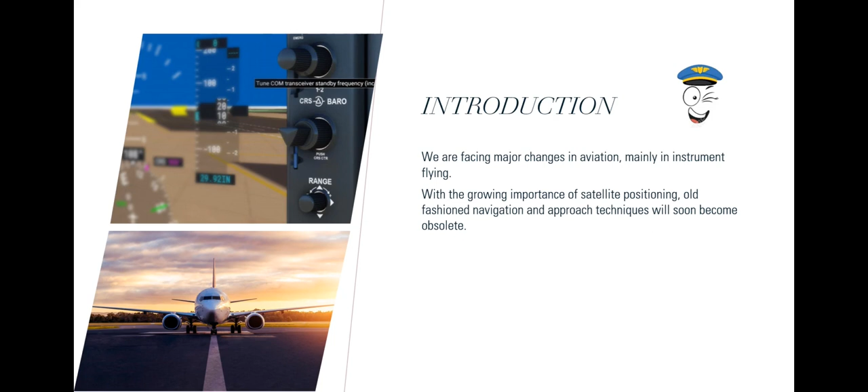With the growing importance of satellite positioning, old-fashioned navigation and approach techniques will soon become obsolete. What about pilot core competencies? Are we bound to follow the line and nothing more, or should we keep training those procedures and techniques to keep what makes a pilot a pilot: mastering?

You think right if you are watching this video. Let's train as a pilot. Satellite navigation and approach techniques will be a part of your training.

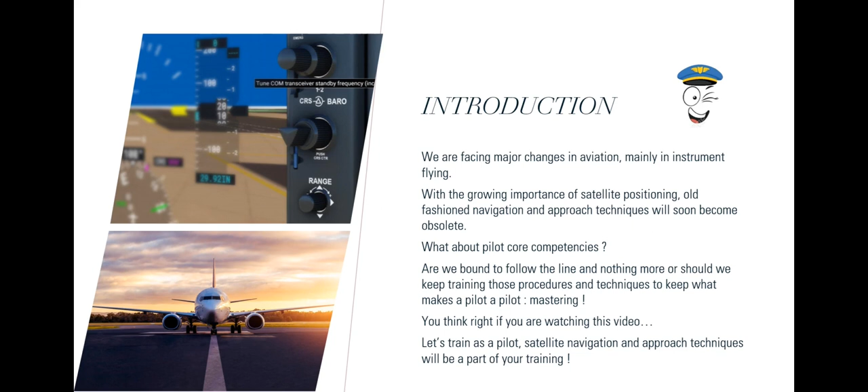Theory. System description.

Automatic Direction Finding, ADF, is an electronic aid to navigation that identifies the relative bearing of an aircraft from a radio beacon transmitting in the MF or LF bandwidth, such as a non-directional beacon or commercial radio broadcast station.

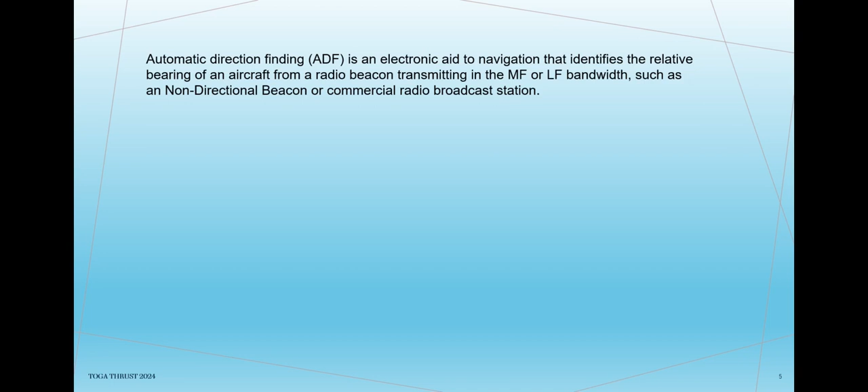Essentially, ADF consists of a loop aerial which is rotated physically or electronically and detects the direction of minimum reception from the beacon relative to the aircraft direction.

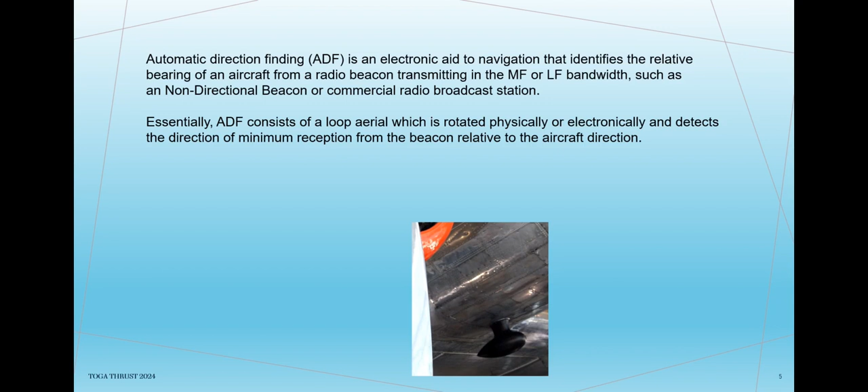This information can be used directly to home to the beacon. Alternatively, the aircraft equipment combines the relative bearing with heading information from the aircraft compass to provide bearing position lines which may be plotted on a chart.

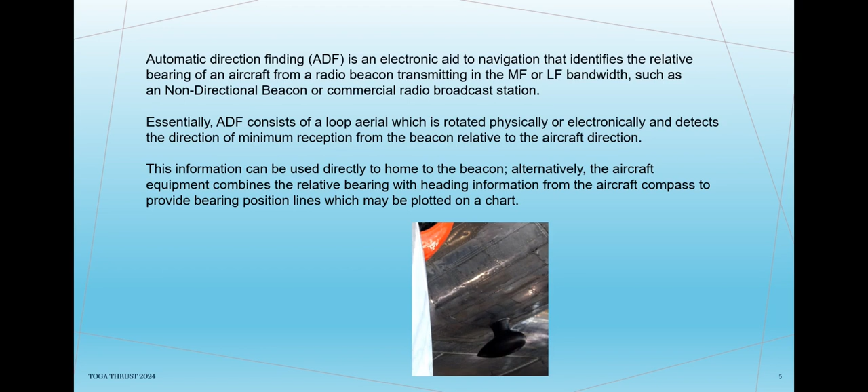An automatic direction finder, ADF, is a marine or aircraft radio navigation instrument that automatically and continuously displays the relative bearing from the ship or aircraft to a suitable radio station.

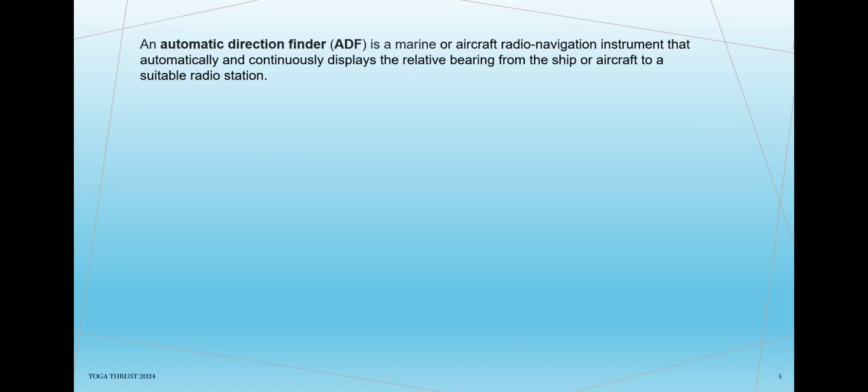ADF receivers are normally tuned to aviation or marine NDBs, non-directional beacons, operating in the LW band between 190 to 535 kHz. Like RDF, radio direction finder units, most ADF receivers can also receive medium-wave AM broadcast stations, though these are less reliable for navigational purposes.

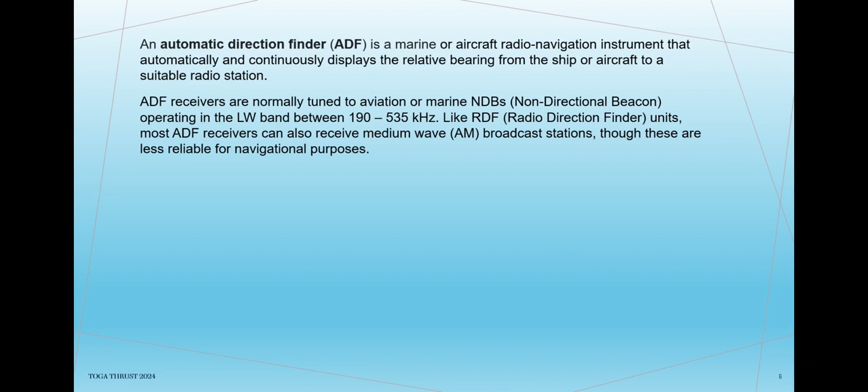The operator tunes the ADF receiver to the correct frequency and verifies the identity of the beacon by listening to the Morse code signal transmitted by the NDB.

On marine ADF receivers, the motorized ferrite bar antenna atop the unit, or remotely mounted on the masthead, would rotate and lock when reaching the null of the desired station. A center line on the antenna unit moving atop a compass rose indicated in degrees the bearing of the station.

On aviation ADFs, the unit automatically moves a compass-like pointer, RMI, to show the direction of the beacon. The pilot may use this pointer to home directly towards the beacon, or may also use the magnetic compass and calculate the direction from the beacon, the radial, at which their aircraft is located.

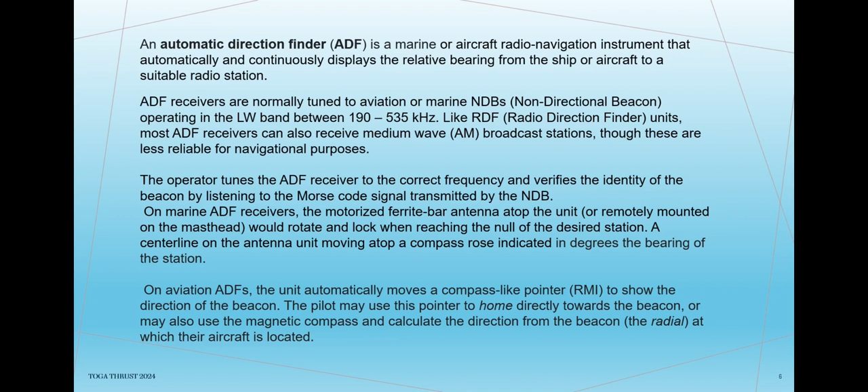Unlike the RDF, the ADF operates without direct intervention, and continuously displays the direction of the tuned beacon.

Initially, all ADF receivers, both marine and aircraft versions, contained a rotating loop or ferrite loop stick aerial driven by a motor which was controlled by the receiver. Like the RDF, a sense antenna verified the correct direction from its 180-degree opposite.

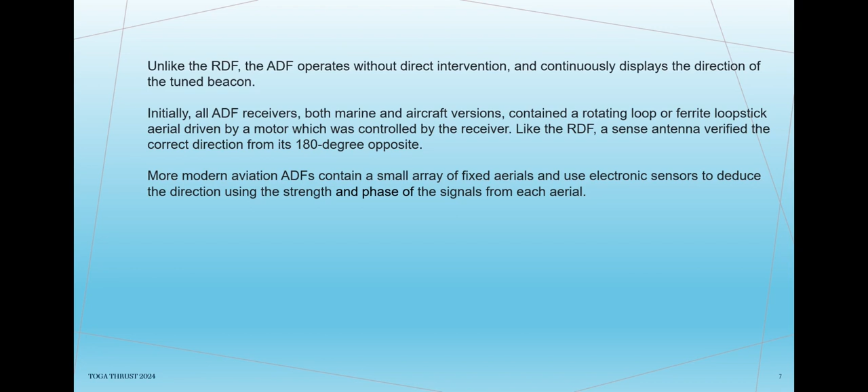More modern aviation ADFs contain a small array of fixed aerials and use electronic sensors to deduce the direction using the strength and phase of the signals from each aerial.

The electronic sensors listen for the trough that occurs when the antenna is at right angles to the signal, and provide the heading to the station using a direction indicator.

In flight, the ADF's RMI or direction indicator will always point to the broadcast station regardless of aircraft heading.

Dip error is introduced, however, when the aircraft is in a banked attitude, as the needle dips down in the direction of the turn. This is the result of the loop itself banking with the aircraft and therefore being at a different angle to the beacon.

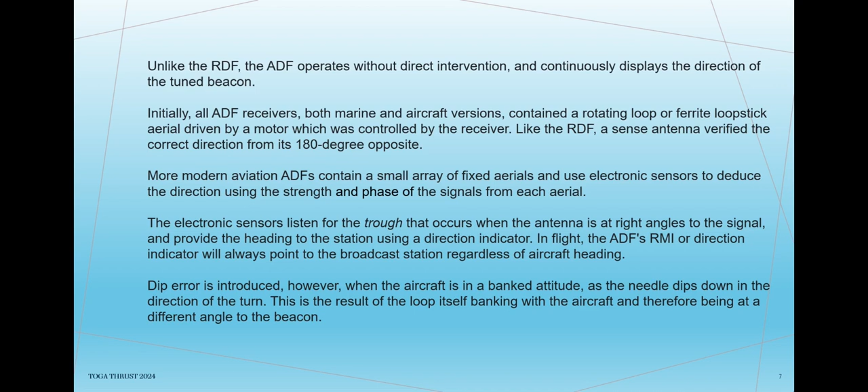For ease of visualization, it can be useful to consider a 90 degrees banked turn, with the wings vertical. The bearing of the beacon as seen from the ADF aerial will now be unrelated to the direction of the aircraft to the beacon.

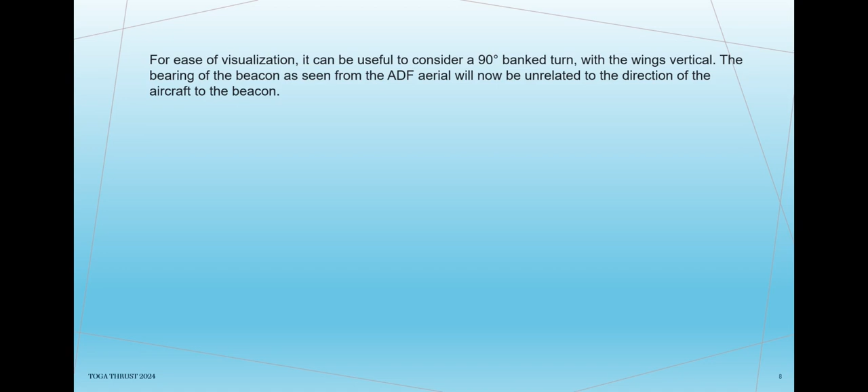Dip error is sometimes wrongly confused with quadrantal error, which is the result of radio waves being bounced and re-radiated by the airframe.

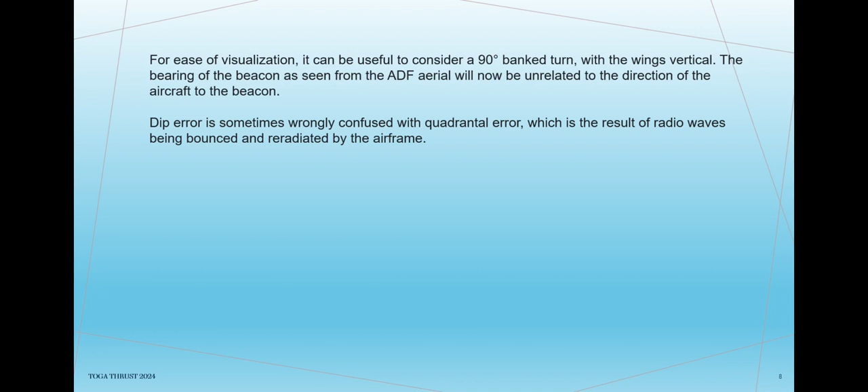Quadrantal error does not affect signals from straight ahead or behind, nor on the wingtips. The further from these cardinal points and the closer to the quadrantal points, i.e. 45 degrees, 135 degrees, 225 degrees and 315 degrees from the nose, the greater the effect, but quadrantal error is normally much less than dip error, which is always present when the aircraft is banked.

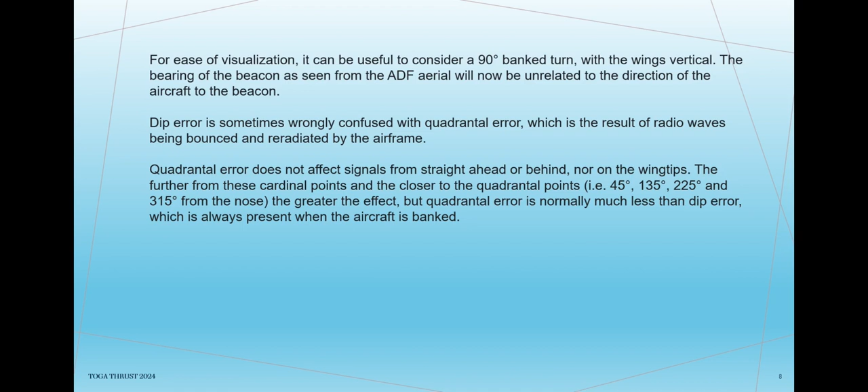ADF receivers can be used to determine current position, track inbound and outbound flight path, and intercept a desired bearing. These procedures are also used to execute holding patterns and non-precision instrument approaches.

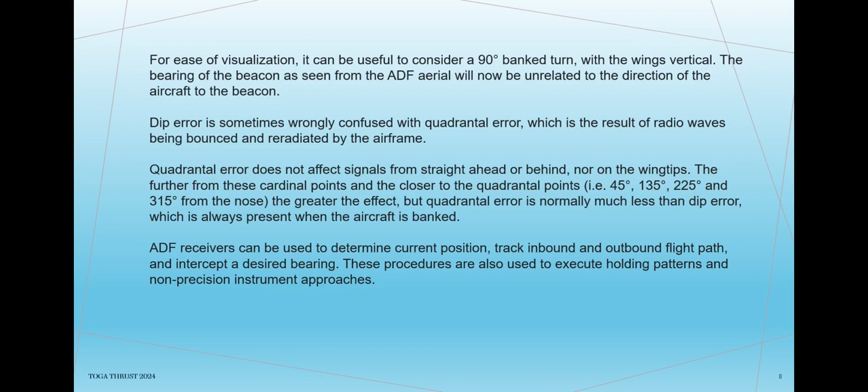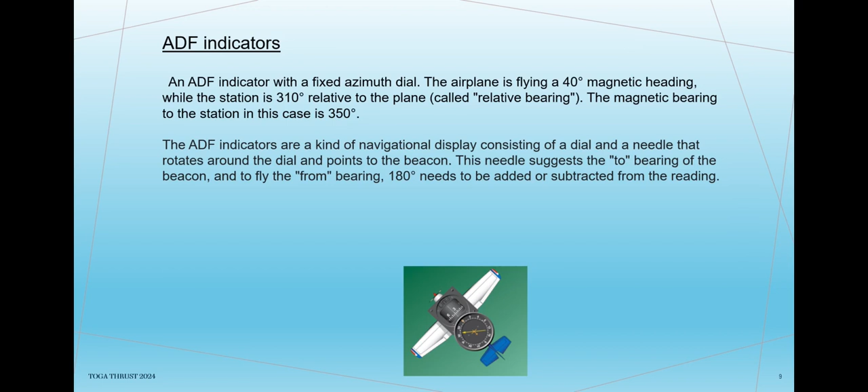The ADF indicators are a kind of navigational display consisting of a dial and a needle that rotates around the dial and points to the beacon. This needle suggests the bearing of the beacon, and to fly the from bearing, 180 degrees needs to be added or subtracted from the reading.

There are two types of ADF indicators: the fixed azimuth dial type, where 0 degrees always represents the aircraft nose and 180 degrees always represents the aircraft tail, and the type with rotating dials that can be rotated to align the azimuth with the aircraft heading.

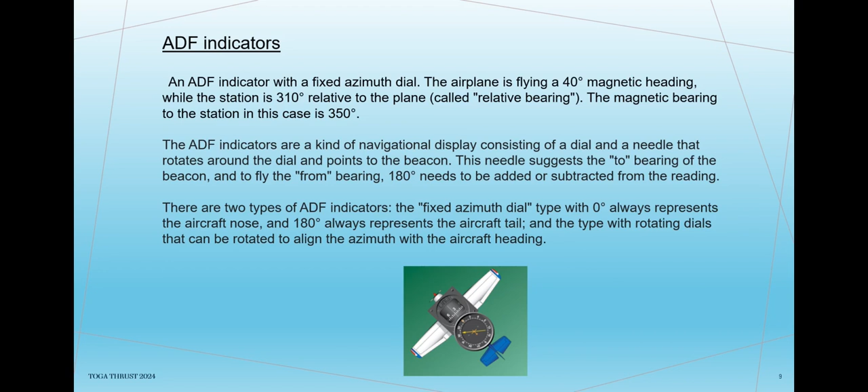Station passage. As an aircraft nears an NDB station, the ADF becomes increasingly sensitive. Small lateral deviations result in large deflections of the needle, which sometimes shows erratic left/right oscillations.

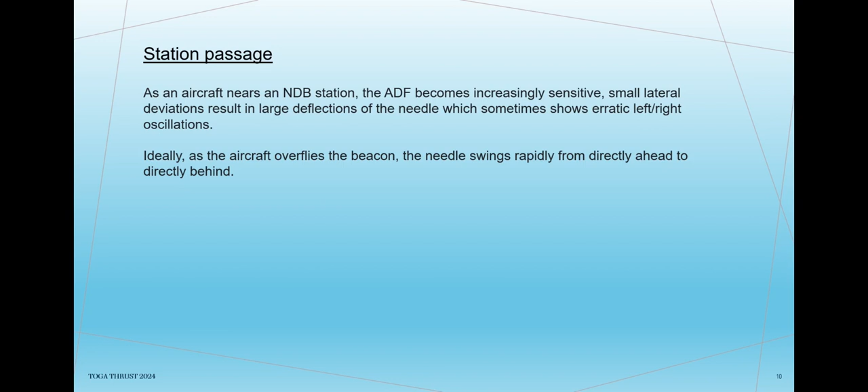Ideally, as the aircraft overflies the beacon, the needle swings rapidly from directly ahead to directly behind. This indicates station passage and provides an accurate position fix for the navigator. Less accurate station passage, passing slightly to one side or another, is shown by slower, but still rapid, swinging of the needle.

The time interval from the first indications of station proximity to positive station passage varies with altitude, from a few moments at low levels to several minutes at high altitude.

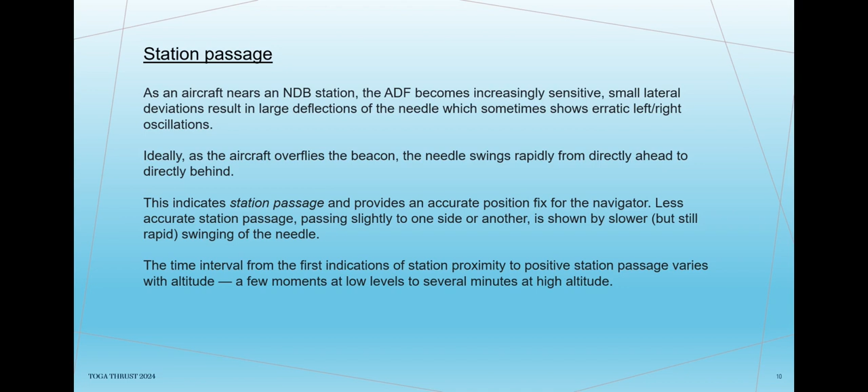Homing. The ADF may be used to home in on a station. Homing is flying the aircraft on the heading required to keep the needle pointing directly to the 0 degrees, straight ahead, position.

To home into a station, tune the station, identify the Morse code signal, then turn the aircraft to bring the ADF azimuth needle to the 0 degrees position. Turn to keep the ADF heading indicator pointing directly ahead.

Homing is regarded as poor piloting technique because the aircraft may be blown significantly or dangerously off course by a crosswind and will have to fly further and for longer than the direct track.

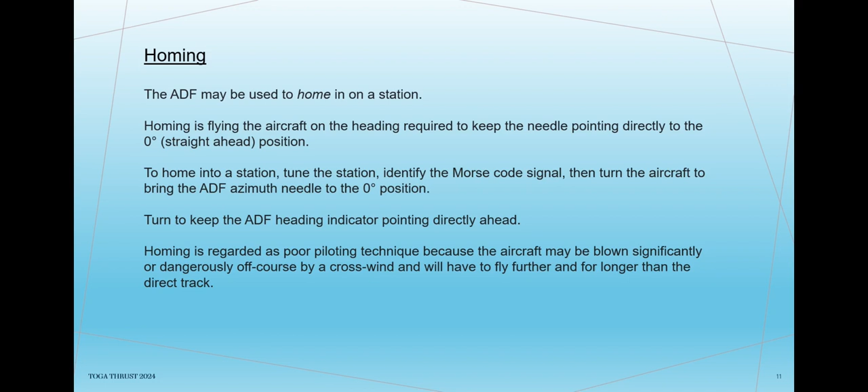Tracking. The ADF may also be used to track a desired course using an ADF and allowing for winds aloft, winds which may blow the aircraft off course.

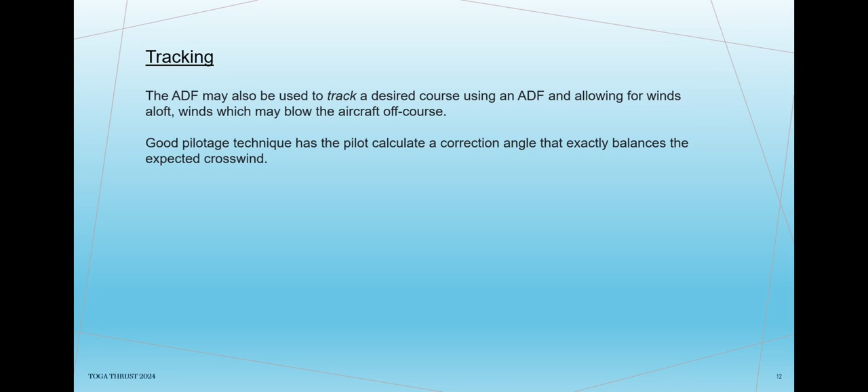Good pilotage technique has the pilot calculate a correction angle that exactly balances the expected crosswind. As the flight progresses, the pilot monitors the direction to or from the NDB using the ADF, and adjusts the correction as required. A direct track will yield the shortest distance and time to the ADF location.

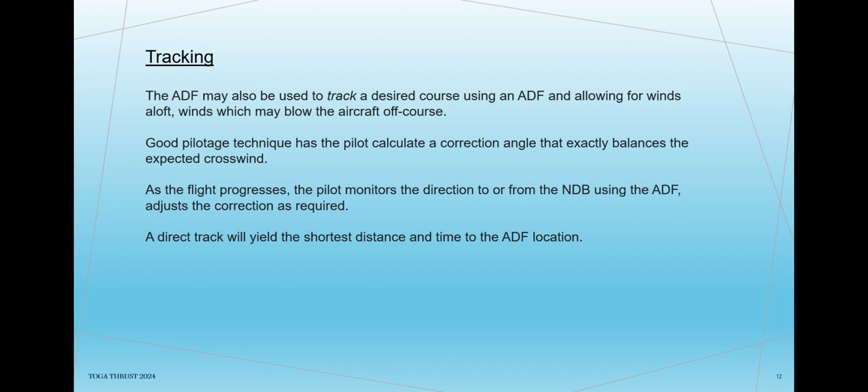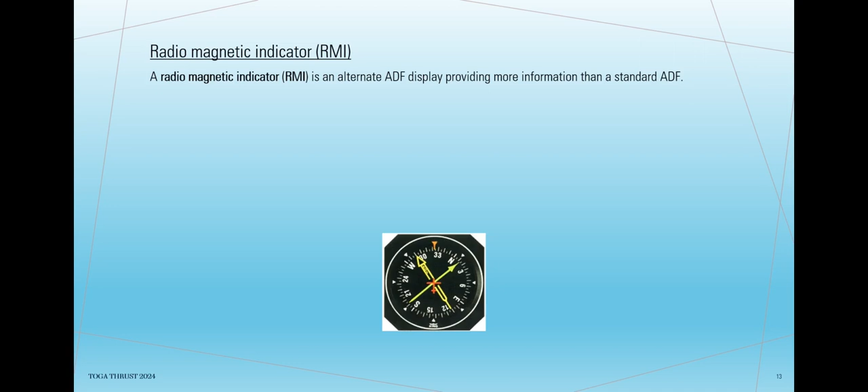Radiomagnetic indicator, RMI. A radiomagnetic indicator, RMI, is an alternate ADF display providing more information than a standard ADF. While the ADF shows relative angle of the transmitter with respect to the aircraft,

an RMI display incorporates a compass card, actuated by the aircraft's compass system, and permits the operator to read the magnetic bearing to or from the transmitting station, without resorting to arithmetic.

Most RMIs incorporate two direction needles. Often one needle, the thicker, double-barred needle, is connected to an ADF, and the other, generally thin or single-barred, is connected to a VOR.

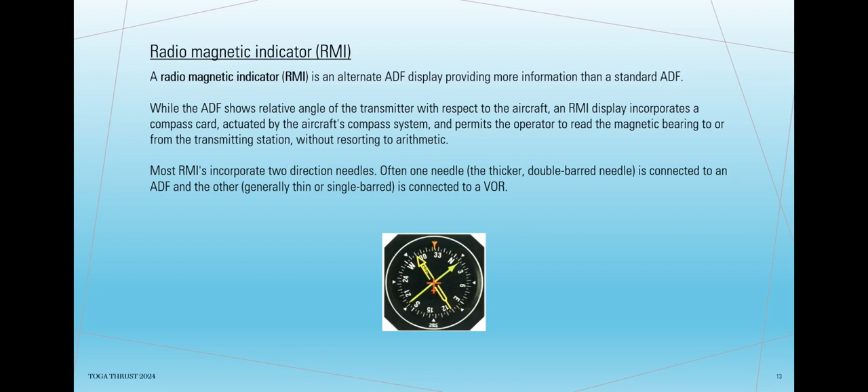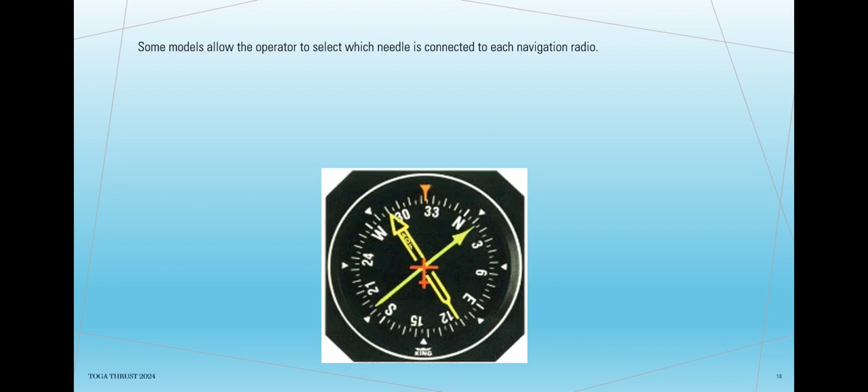Some models allow the operator to select which needle is connected to each navigation radio. There is great variation between models, and the operator must take care that their selection displays information from the appropriate ADF and VOR.

This instrument display can replace a magnetic compass display in the instrument panel, but not necessarily the gyroscopic heading indicator.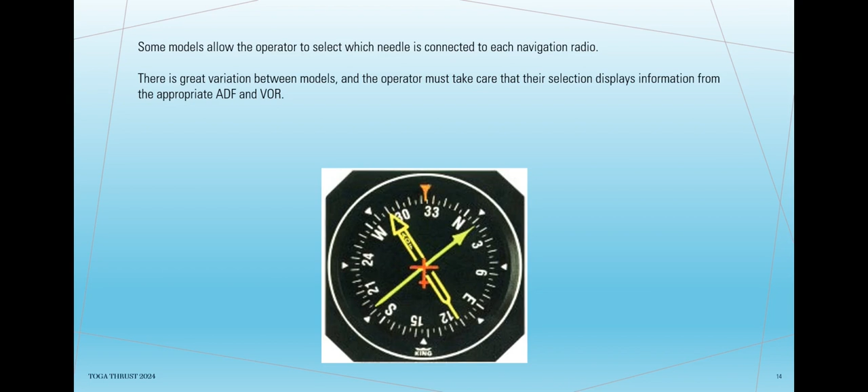ADF approach chart description. The way to get started is to quit talking and begin doing.

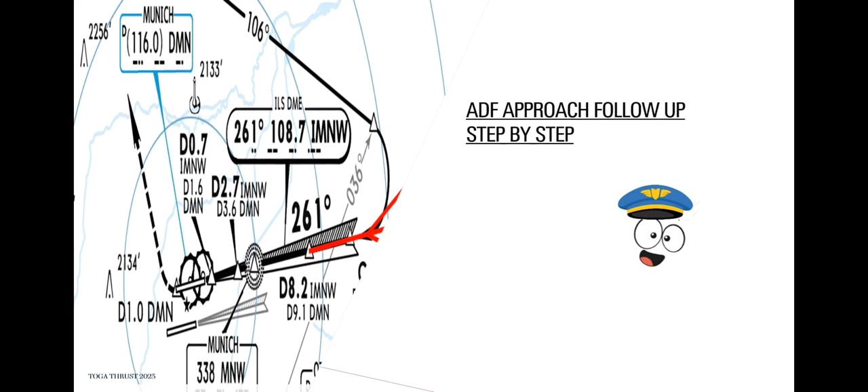Consider an NDB approach chart, LFAV. We will depict all the approach phases step by step.

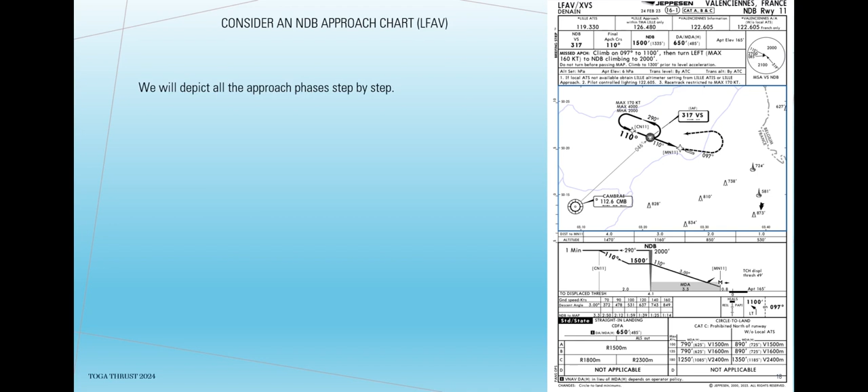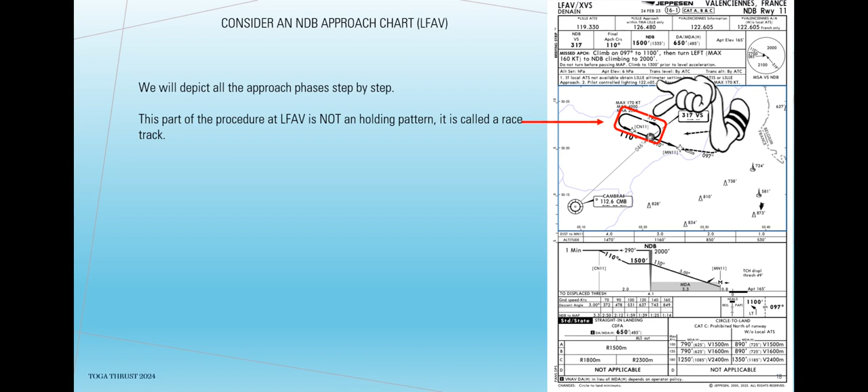This part of the procedure at LFAV is not a holding pattern, it is called a racetrack. Racetracks are flight paths specified on approach charts and are used to position the aircraft on the approach track. Holding patterns are used to make an aircraft wait before approach.

A racetrack is meant to be an obligatory step of the approach, or to allow for a correct preparation of the approach if not ready when reaching the fix. While it is not always mandatory to be flown, in this case it is, as it includes a step down from 2,000 feet to 1,500 feet.

The outbound leg of a racetrack may be more than 1 minute, or be referenced to a DME reading, or to a crossing radial.

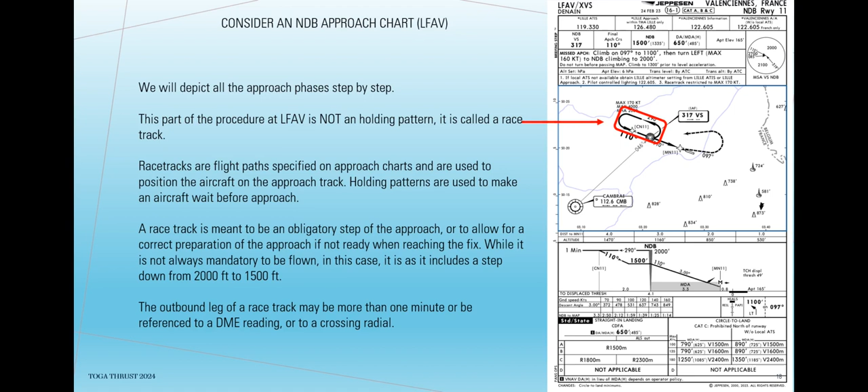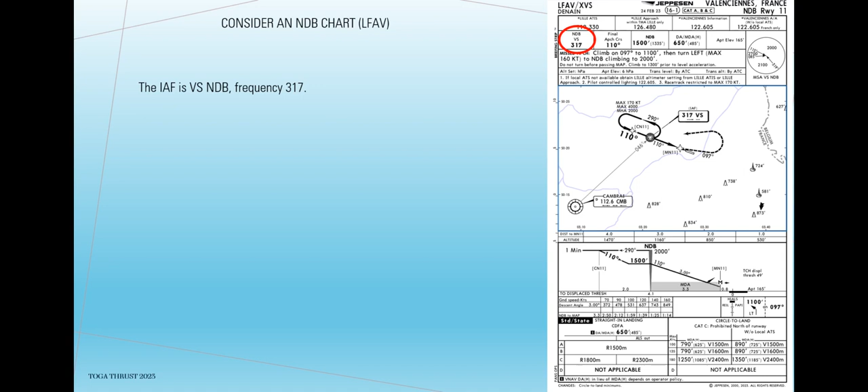The initial approach fix is Victor Sierra NDB, frequency 317. Whatever the direction you are coming from, overfly the initial approach fix and you will enter the racetrack.

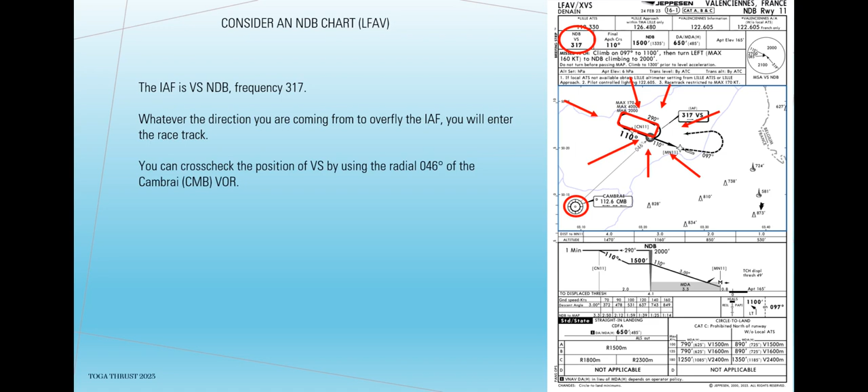You can cross-check the position of Victor Sierra by using the radial 046 degrees of the Cambrai, Charlie Mike Bravo, VOR.

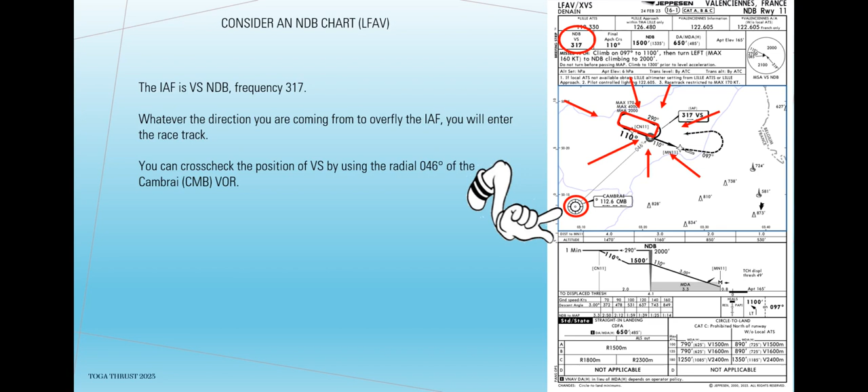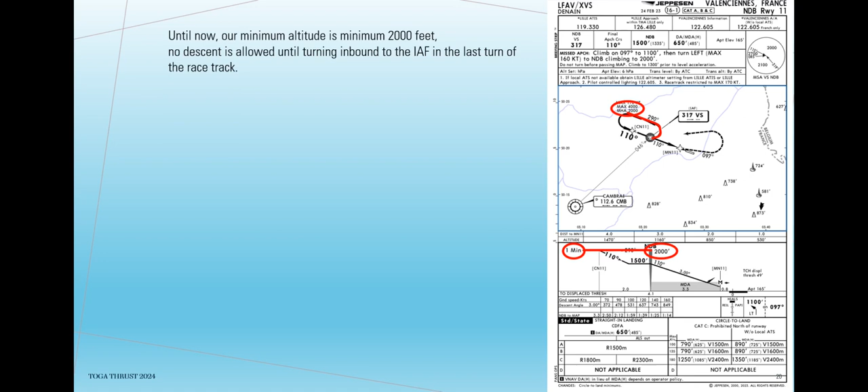Until now, our minimum altitude is minimum 2,000 feet. No descent is allowed until turning inbound to the initial approach fix in the last turn of the racetrack.

What if I'm not ready for the approach? You can always tell the ATC that you will make another turn in the racetrack to be ready, then you are making and holding using the racetrack.

You perform the entry in the racetrack exactly in the same way as for a holding pattern. In this particular case, the outbound is 1 minute, same as for a holding pattern. Refer to the briefing dedicated to holding patterns.

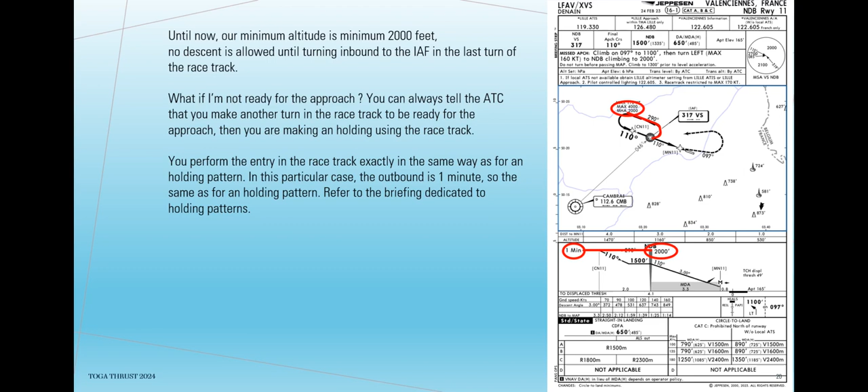Then you turn inbound to the final approach fix, which is the same as the initial approach fix in this case.

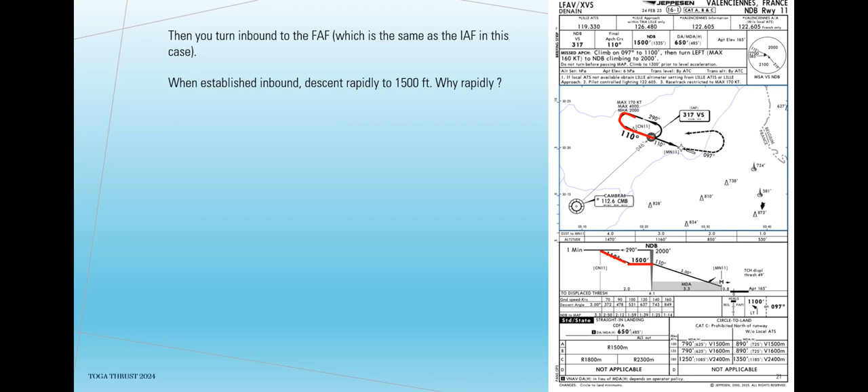When established inbound, descend rapidly to 1,500 feet. Why rapidly? Because you have to descend 500 feet and you have 2 nautical miles, so about 1 minute to descend. Stabilize and configure with approach flaps; they have to be set 1 nautical mile before the final approach fix according to SOPs. So you must be at 1,500 feet, on speed, and configured when overflying the final approach fix.

Then the show is starting. When passing the final approach fix, use the magic 5 Gs.

Gear, down. Glide, slope follow. Go timer, if needed. Go around altitude, set. Green lights, check gear and flaps lights. Talk, passing the final approach fix inbound, or passing Victor Sierra inbound.

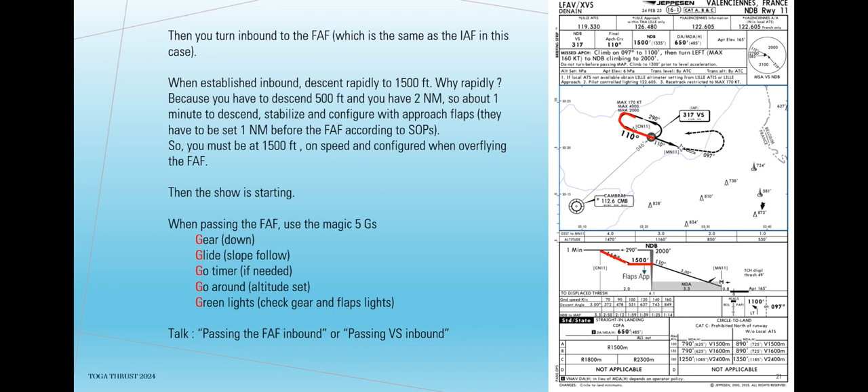Lot of work, you say. Yes, but not finished.

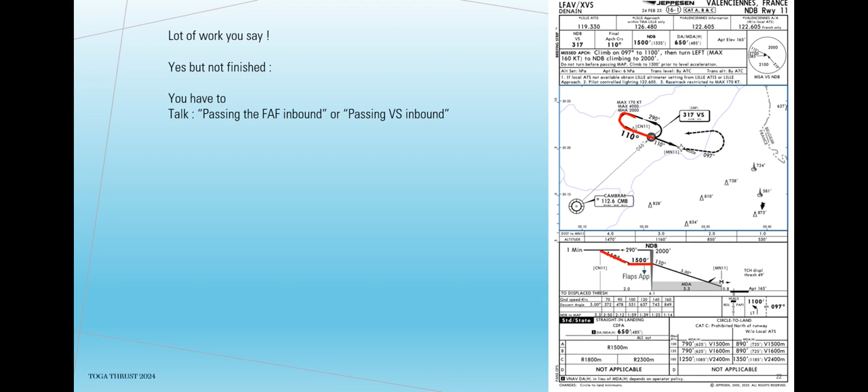You have to talk, passing the final approach fix inbound, or passing Victor Sierra inbound. And ATC will reply with contact Valenciennes info on 122.605. Then you switch frequency, call info stating your position and intentions, copy the traffic and the elements. You have to do that on top.

Let's have a closer look at those steps.

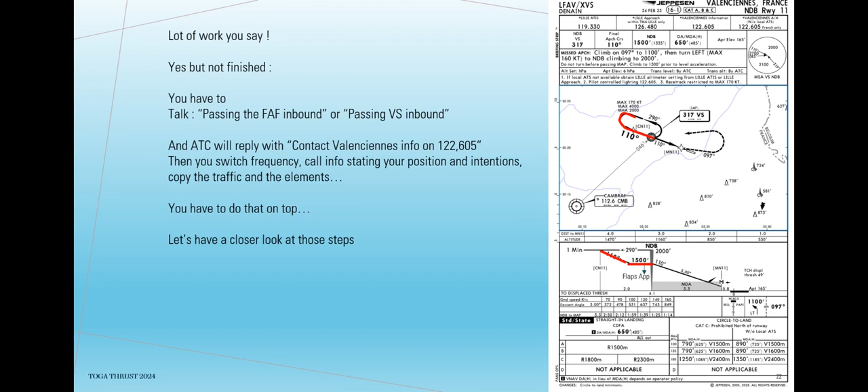Gear, down, at the final approach fix as per SOPs. Glide, start the descent. At which rate?

Check your ground speed. If you fly at 100 knots, you are asked for a rate of descent of 531 feet per minute. Be as precise as possible, as on this approach you have no other tool to control your vertical position. You can refer to the GPS waypoint Mike November 11, but if you do not have GPS and adopt a steeper descent rate, you might be introduced to the planet Earth unexpectedly.

Or a lower rate will not allow you to be at the minimas to see the runway.

Go timer, why? Because you need to know when you are supposed to reach the missed approach point, M on the chart. And as you have no other means than the timer, you have to start it at the right time. For how much time? Check the table. You see the NDB to MAP time, for 3.3 nautical miles, is, at a ground speed of 100 knots, 1 minute and 59 seconds.

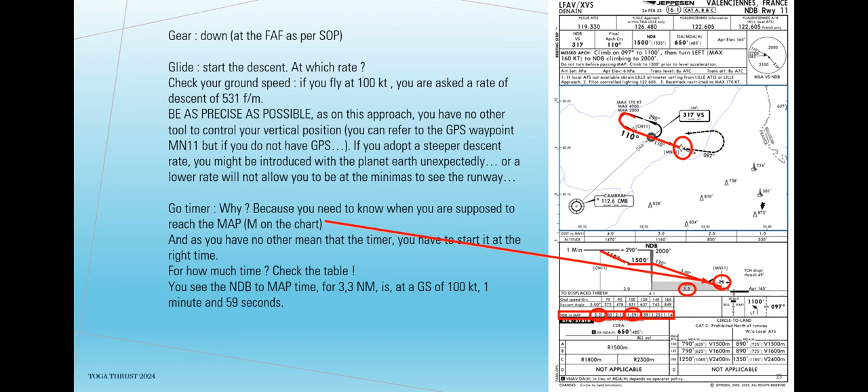Be careful. As you see, you are flying this approach in CDFA, which means continuous descent final approach. In this type of approach, you are not authorized to perform a level off.

But you can adapt the rate of descent to reach your goal. If you reach the minimas too early, no level off, you must do a go around.

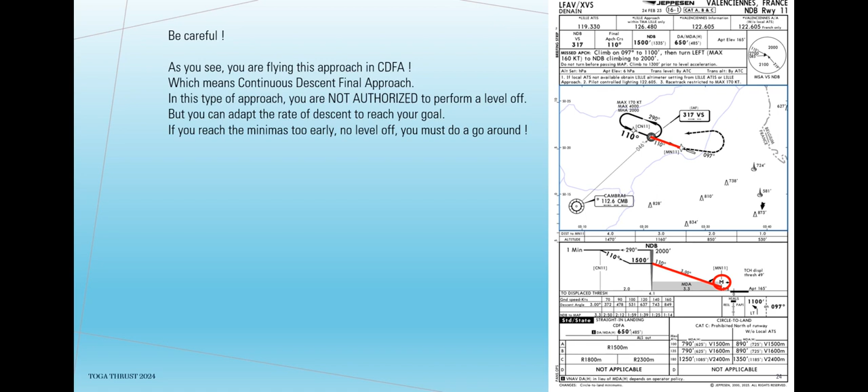Go around altitude, set on the altitude bug, is self-explanatory.

Green lights. By the time you did all those steps, you should be able to check the 3 green lights of the landing gear and the flaps light or position.

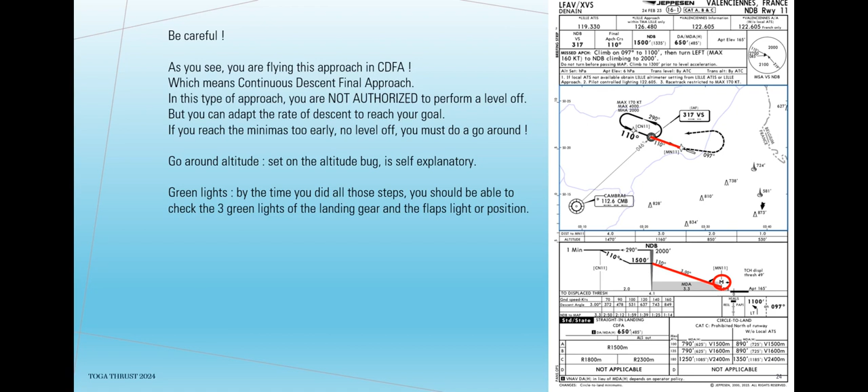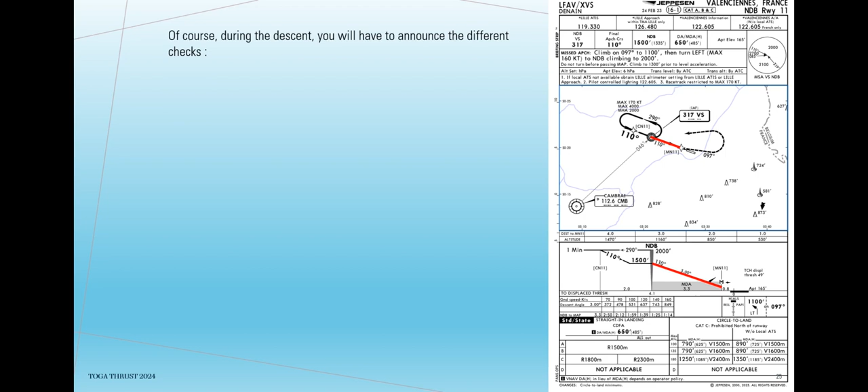During the descent, you will have to announce the different checks: 1000 AGL for the approach ban concept, 500 feet above minimas for stabilization criteria and checklists done, and 100 feet above minimas to start looking for visual references for landing.

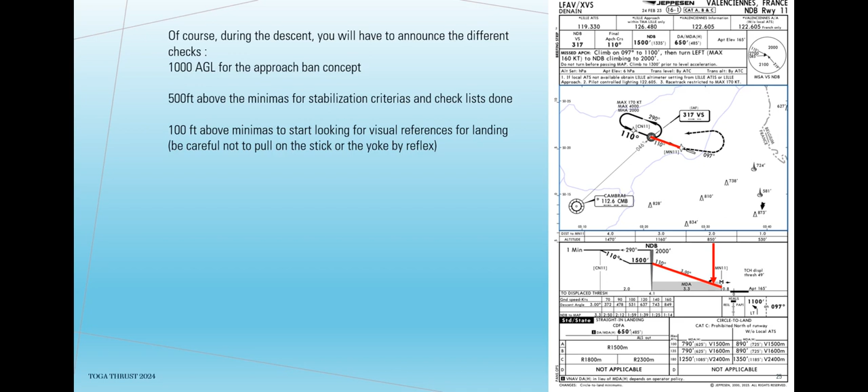Be careful not to pull on the stick or yoke by reflex at minimas. If visual clues are found, announce visual, continue, and proceed for landing, following the visual guidance if any, PAPI or VASI, then land. If no visual clue is found, at minimas call go-around and proceed for the depicted procedure, except if you have received another clearance by ATC.

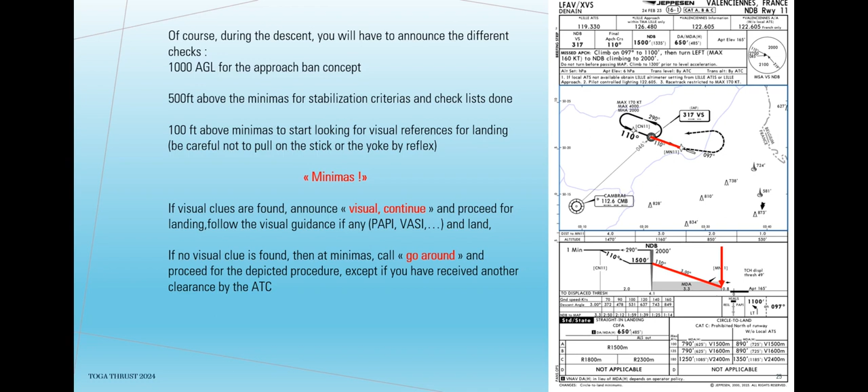The approach ban, NCO.OP.210, prohibits the continuation of an instrument approach below 1,000 feet when the reported RVR is below the operator's aerodrome operating minimum. It is intended to avoid an unacceptable rate of go-arounds when visual reference cannot be acquired and maintained at DH or MDH.

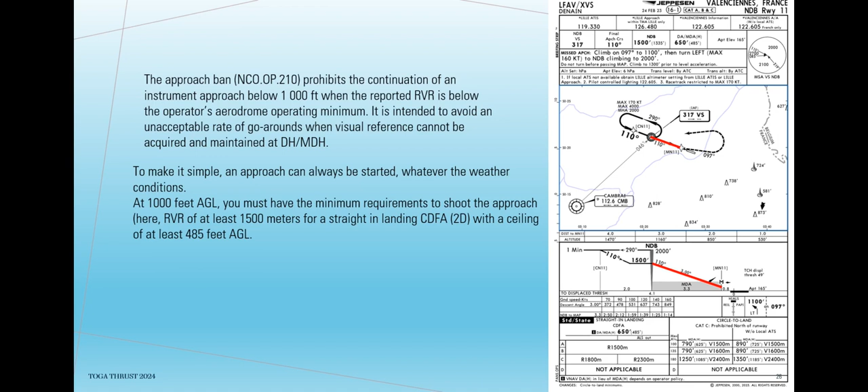To make it simple, an approach can always be started whatever the weather conditions. At 1,000 feet AGL you must have the minimum requirements to shoot the approach. Here, RVR of at least 1,500 meters for a straight-in CDFA 2D approach, with a ceiling of at least 485 feet AGL. So at 1000 feet AGL, grab the mic and just say RVR check, and get the actual data.

If above the minimums, then continue; if not, then go around. After passing the 1000 feet AGL where you had the required minimas, if they drop below the minimum required, you may continue the approach.

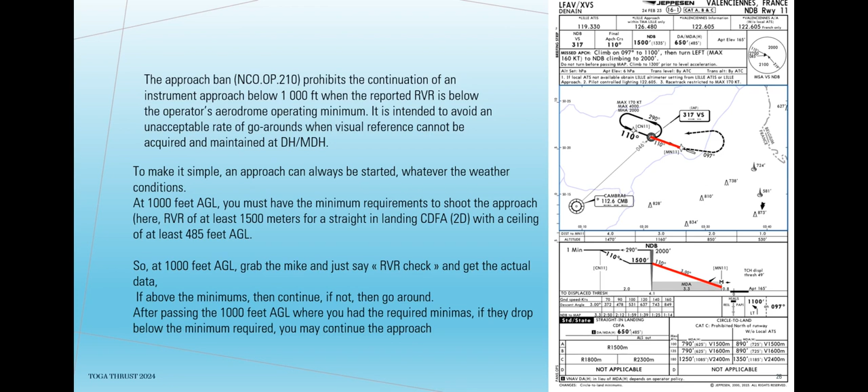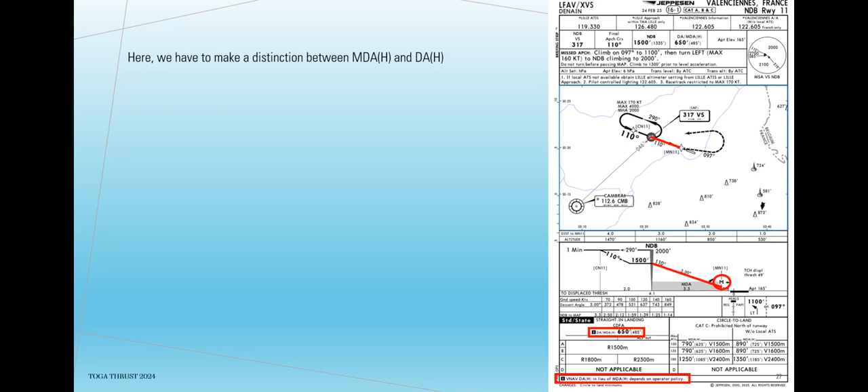We have to make a distinction between MDA, H and DA, H. DA, H, decision altitude height, is the altitude or height at which you make the decision either to continue for landing or go around. Of course it takes a little time during which the aircraft continues the descent. In a go-around at the DA, H, you will continue to descend slightly below the DA, H during the procedure.

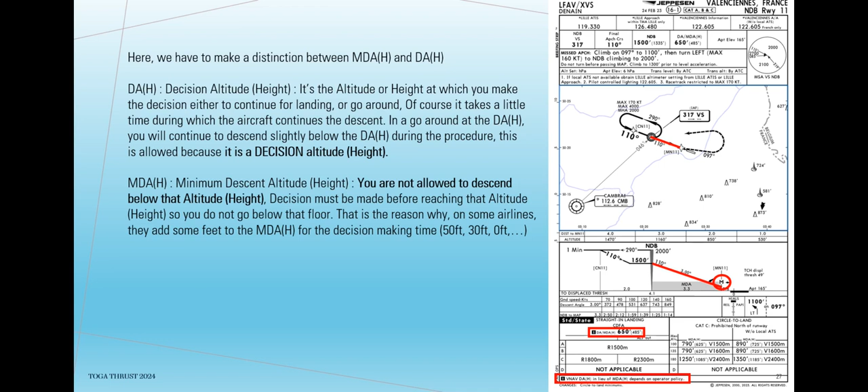This is allowed because it is a decision altitude, height. MDA, H, minimum descent altitude height: you are not allowed to descend below that altitude. Decision must be made before reaching that altitude so you do not go below that floor. That is the reason why some airlines add some feet to the MDA, H for the decision-making time: 50 feet, 30 feet, 0 feet. Adding some feet to the MDA, H is the decision of the operator only, airline or you if flying private, and here he can also consider the minimum as a DA, H.

Once a go-around is started, it cannot be stopped.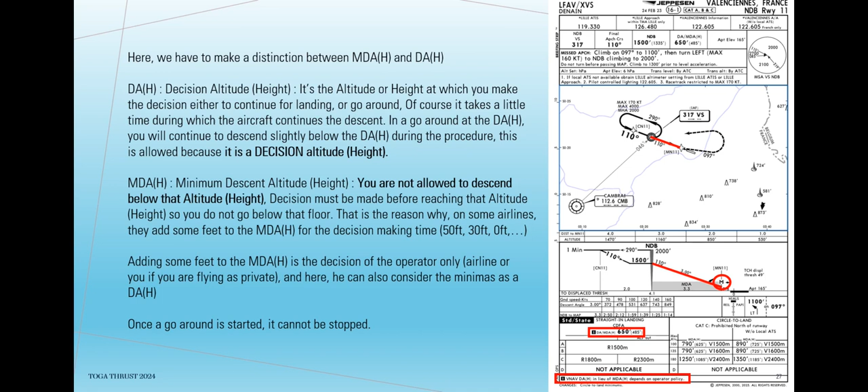Go-around. The go-around will be flown exactly as depicted on the approach chart: climb on 097 degrees to 1,100 feet, then turn left, max 160 knots, to NDB climbing to 2,000 feet.

Main things to remember when preparing the approach and doing the briefing, refer to the briefing presentation: first and maybe second direction, first and maybe second altitude. For example here, 097 degrees, 1,100 feet, left to NDB, 2,000 feet.

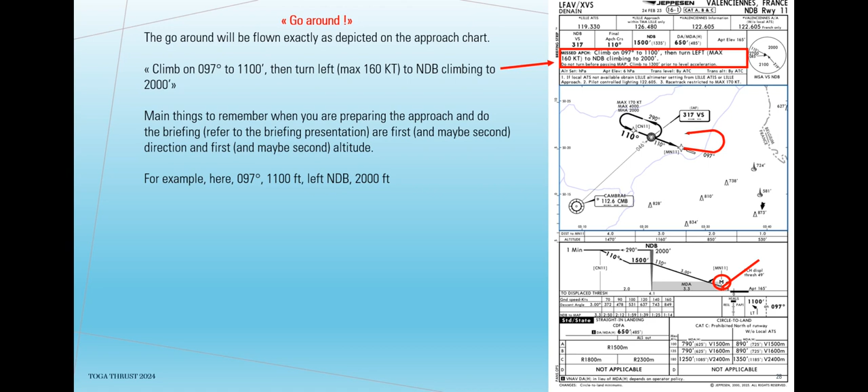Altimeter bugs will be set to 2,000 feet, which is the go-around altitude without level off. If there is a level off during the depicted procedure, altimeter bugs will be set to the first level off depicted to avoid any altitude bust. Remark: check that you cannot turn before passing the missed approach point, and you cannot accelerate before 1,300 feet.

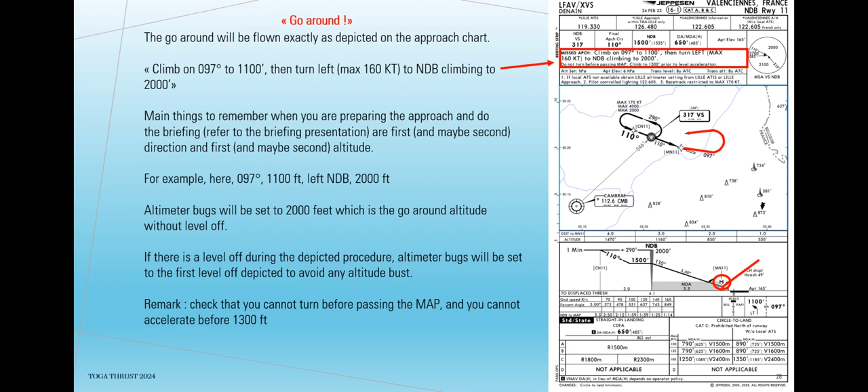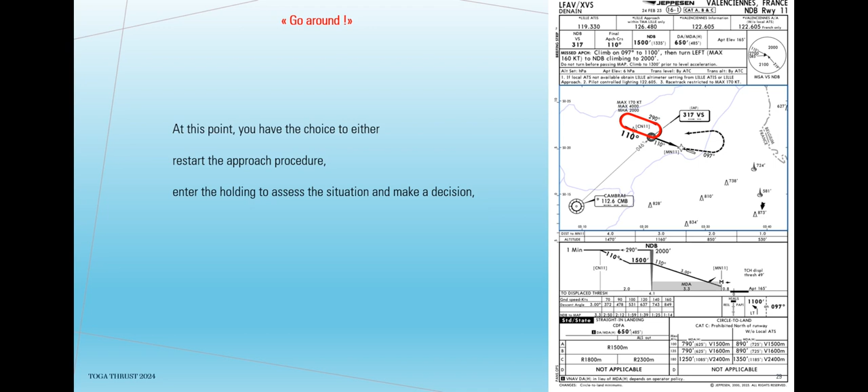At this point, you have the choice to either restart the approach procedure, enter the holding to assess the situation and make a decision, or depart to your alternate.

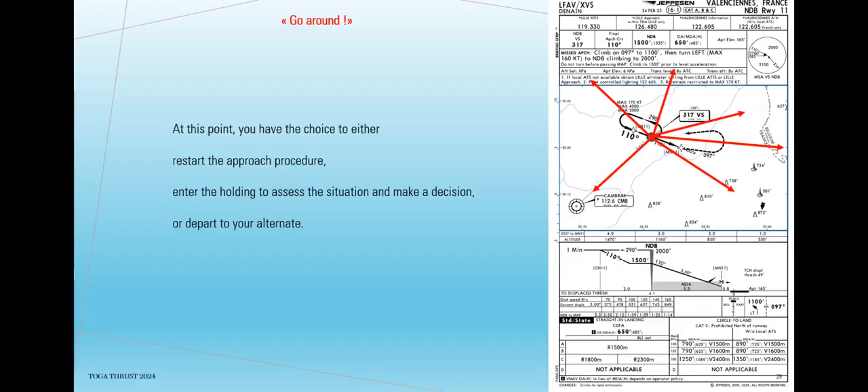Failures, irregularities and contingencies. As a good pilot, you know that things are not always working as expected, so you are ready for as much unexpected events as possible. Among those, what can you foresee? Not talking about airport closure or aircraft technical defects such as engine failure or hydraulic failure, but only considering weather and/or navigation instruments.

Weather. In this case, NDB, it is the least precise approach type. Your only option is to discontinue the approach and either proceed to enter a holding, if you have fuel enough to wait for better weather conditions, or go to an alternate with more friendly weather forecasts.

Of course, as a good pilot, you already plan that if you were to decide to divert, you would go to such airport that has such conditions according to the destination alternate rules. For a diversion airport with only a 2D approach available, you plan your departure with, at the alternate estimated time of arrival ETA, a weather with 1,000 meters more than RVR or visibility required, and a ceiling 200 feet above the ceiling required.

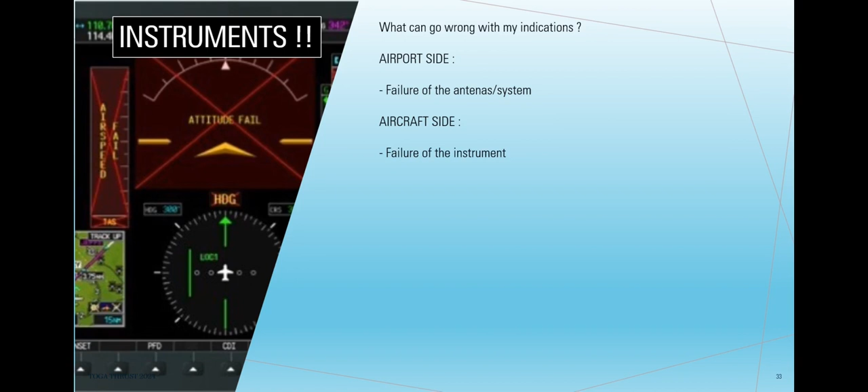What can go wrong with my indications? Airport side: failure of the antennas system. Aircraft side: failure of the instrument, failure of the screen, AFIS.

Be careful, in case of failure of your ADF there will be no warning flag on the instrument. The needle will just stop moving, or will go into the 90 degrees park position. Some pilots like to listen to the ident throughout the approach. I consider that as useless, as after more or less 15 seconds without action after a stimulation in a high workload environment, the brain just disregards the alarm and you just don't hear it anymore. Moreover, that technique does not cover the onboard instrument failure, just the receiver.

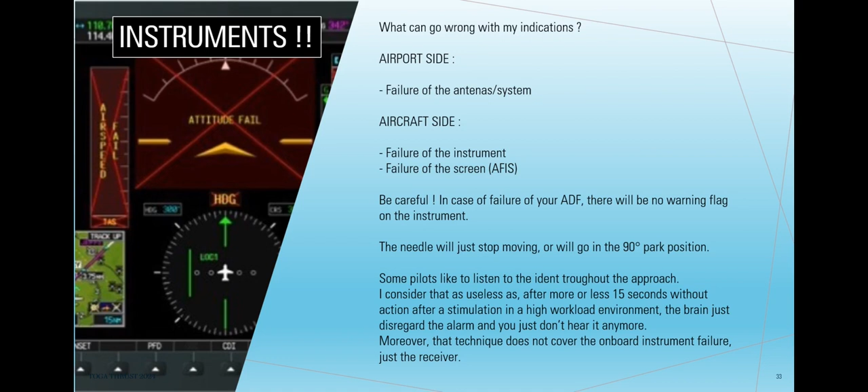Failure of the antennas system. In that case, you don't receive any information from the system. NDB is inoperative: do not start the approach, or go around. Ask ATC if another approach is available, one that you are equipped to fly of course.

Failure of the instrument. You have no more indications on your PFD about your ADF positioning. Above 1000 feet AGL, you can reconfigure to another type of approach, reset your minimas, brief the approach differences and the descent profile. If you completed all your tasks before 1000 feet AGL, then you can continue the new approach, if not, go around.

Do not forget that now you need new RVR minimas and ceiling to be authorized to start the approach. Below 1000 feet AGL, go around and prepare for another type of approach. No real need to consider a diversion as the problem is coming from your equipment. Of course, if NDB is the only approach available, you have to change approach, or divert to another airport where you can use a different approach type.

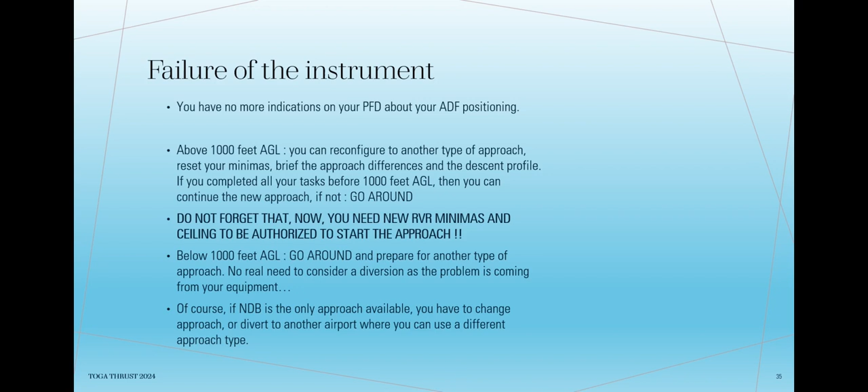Keep in mind at all times: error, unable to intercept and/or track the inbound radial. The QDM to the station is difficult to hold and track as you are very close to the station. Do your best to overfly the station as close as possible to the QDM required. When switching from a QDM to a QDR, after overflying the station, it will be much more easy to track a QDR as you fly away from the station.

Fixes: make small changes, react to the needle tendencies, not movements. Use the rudder on small aircraft, otherwise your aircraft is not turning, just slipping. Not more than 5 degrees correction in heading, 2 degrees correction in pitch at one time, and give some time to the needle to react. Find a heading that holds the needle on target.

The needle is lying to you. Know that there is the dip error in a turn, giving an error of about 10 to 15 degrees during the turn. Never make a decision during a turn, wait for the wings to be level and the needle stabilized.